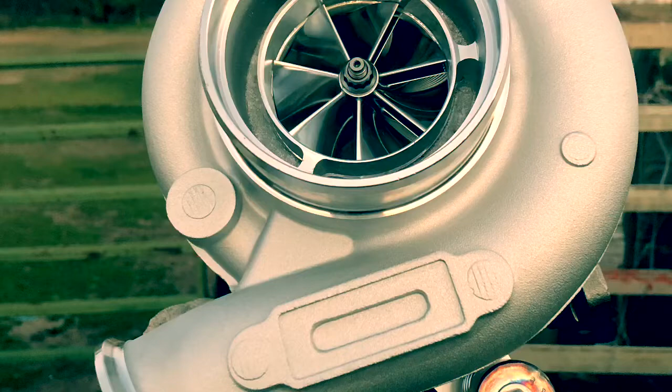I told you guys I'd tell you about the 3 things the turbo cares about, and I'll also tell you what exhaust manifolds do, especially in limited charger classes, or as far as a class rule goes, where there's nothing available and you don't want to change the charger out. But you can do certain things, and by doing this you can get more out of your turbocharger, possibly, as long as you can verify it's a turbine issue and not a compressor deal, or if you're trying to move the peak locations to a higher RPM.

So the horsepower is the same. Say if it makes 800 horsepower at 3600 and you want to make 800 horsepower at 4000, it'll drop the torque number down because we're making the same horsepower at a higher RPM. But we can make that horsepower at the high RPM without running into EGT issues or engine VE issues, volumetric efficiency. So the motor's still going to stay happy and be producing that horsepower just at a higher RPM.

So in case you need more wheel speed, more track speed, you want more wheel speed going down a pull track - these things apply. So, turbine housings.

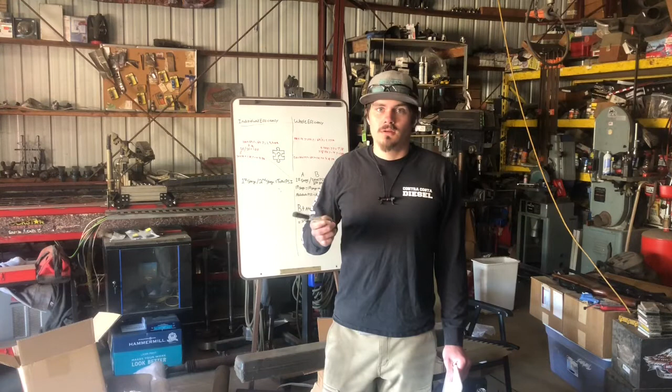Here's the catch-22: the velocity matters up to the point where the turbocharger is rotating at its maximum rotor speed. Say you're operating right at the choke condition - everything up to the choke flow point, usually this is where peak torque is going to be on most turbochargers. We're using all 3: heat energy, pressure energy, so your drive pressure, and then the velocity.

As far as the exhaust speed goes, that's going to be based off of the size of the manifold, the size of the exhaust valve, the exhaust port, the piston speed as far as when the exhaust valve opens, as well as the RPM. That's how all those things are going to be working.

Once you get to the point where you're past peak torque, the only thing at this point now maintaining the speed of the turbocharger is going to be heat and pressure. The velocity, because the velocity through the throat has now hit the point where it's not going to accelerate anymore. Now the turbine wheel is only extracting heat and pressure.

So the pressure is creating a velocity through the nozzle, but it's not a rapidly increasing pressure that we would say is velocity or a force. If the gas has some good speed in it and hammers into the turbine's inducer, that would be velocity. Now if we're doing a constant push against the turbine wheel, I like to see that as pressure.

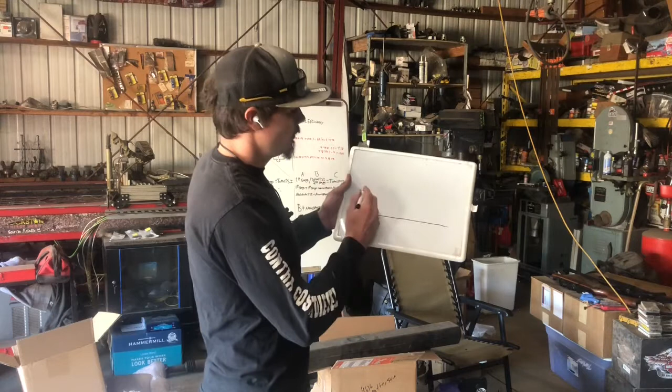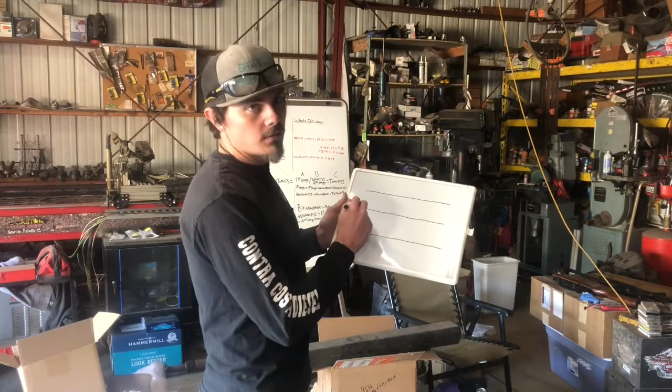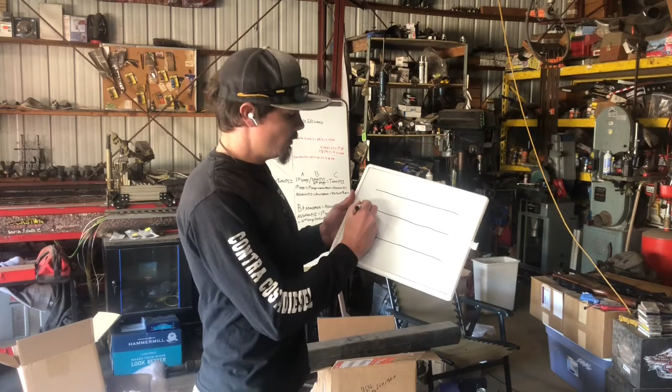So what housings do, hopefully visible here, is we have a baseline, and we're going to compare this to another. We're all used to these sizes, since even Borg Warner, well, not Borg Warner themselves, but we've classified them as a 0.70 and a 0.80, a 12 and a 14, so we can go 12 cm, and up to around 18 cm.

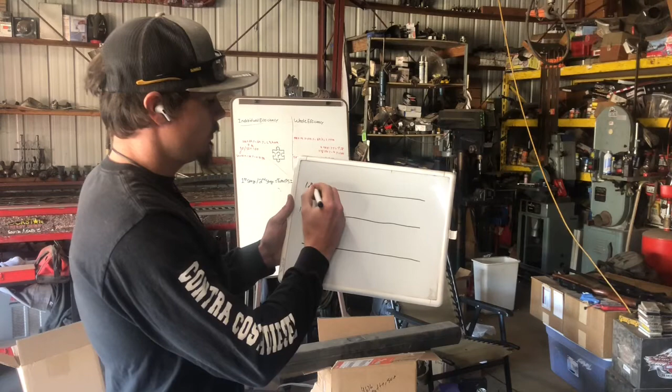So depending on the size of the motor, every time an exhaust valve opens, we have a spike, a pulse wave. It's going to look like this. Every time an exhaust valve opens, you have a spike.

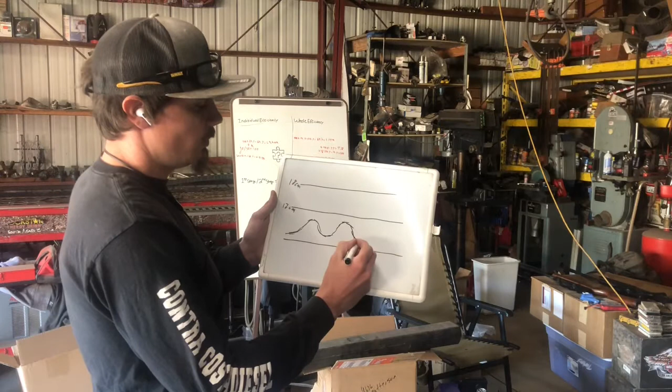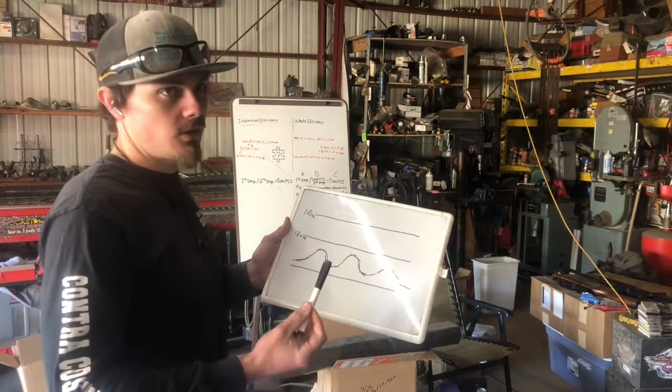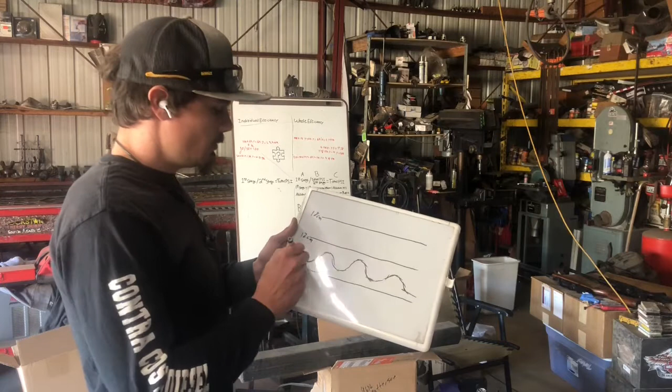Now this pulse only matters up to a certain RPM, and that RPM is frequency based. So that RPM is going to depend on how many cylinders there are, what size each cylinder is, and how often they're going off. But to keep this easy...

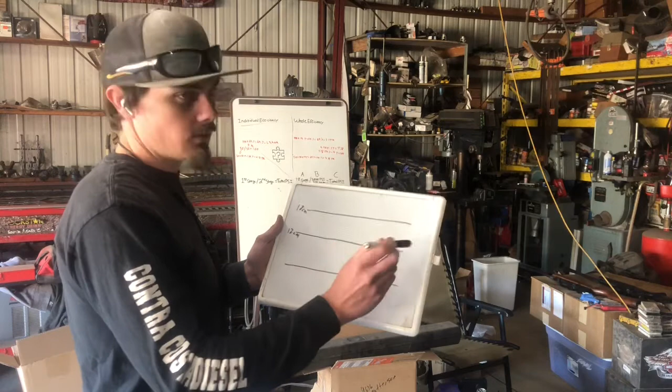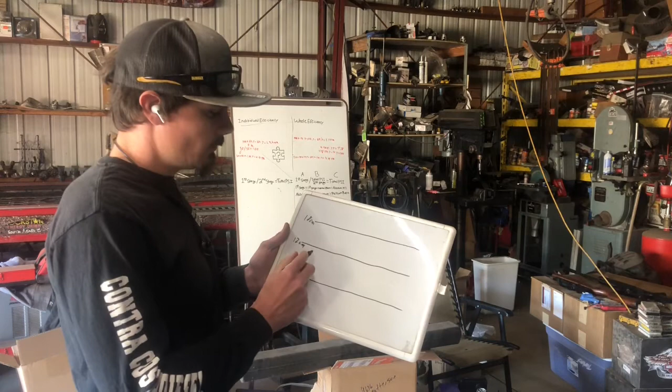On our 6-cylinder 5.9 liter motors, it comes out to about 3,000 RPM. So everything from 0 to 3,000, with 0 being the most prominent pulse, and at 3,000 RPM you would have a pressure number, but the line's going to be fairly flat once we get to 3,000.

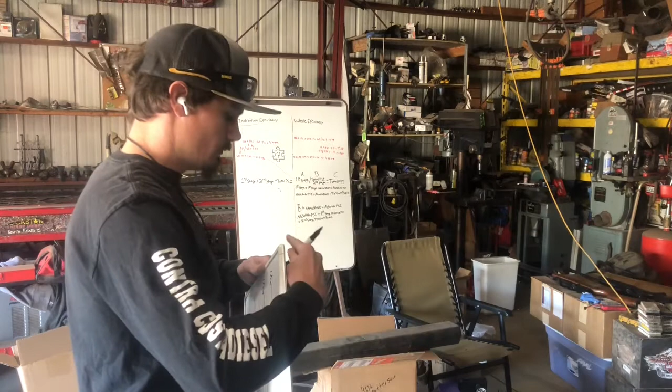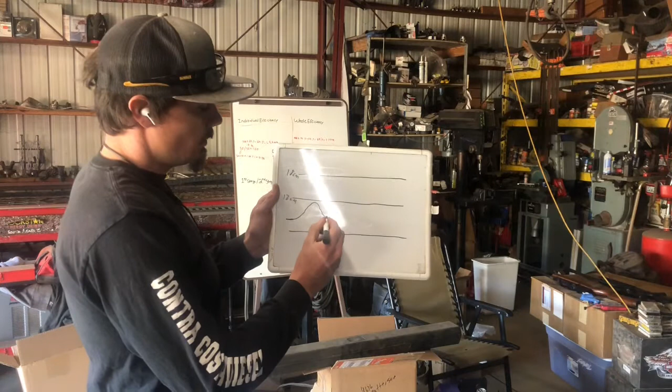So at 1,000 RPM you're going to have this level, then at 1,200 RPM here, and at 3,000 RPM it's just going to sit basically flat in these motors.

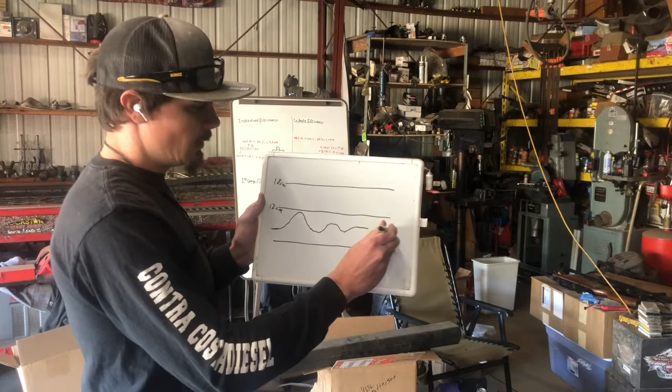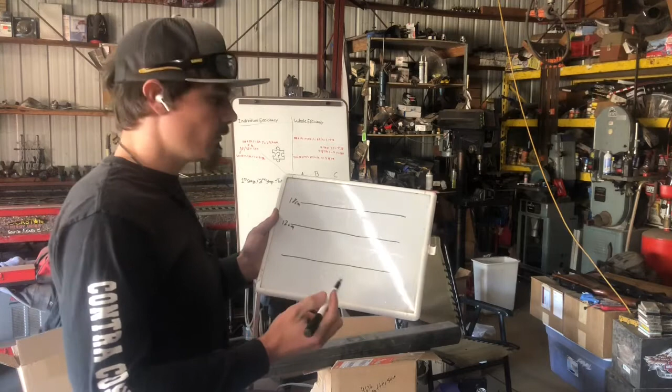That's why on a lot of these high RPM trucks, you don't see undivided manifolds, a lot of them have a divided manifold, because that's how they come. Nobody really makes an undivided performance manifold. But when operating above 3,000, you'll see that they'll have spacers off the exhaust manifold.

So we can see here this spacer coming off the manifold. It may still be divided, but the housing on this massive HX82 in this triple turbo setup, 2 atmospherics, 1 manifold, is not going to be a divided housing, nor does it matter if it's a divided housing. These motors operate at very high engine speeds. They're not looking for response time or spool up characteristics. They will get plenty of speed out of the rotor just by getting the engine's RPM way up high.

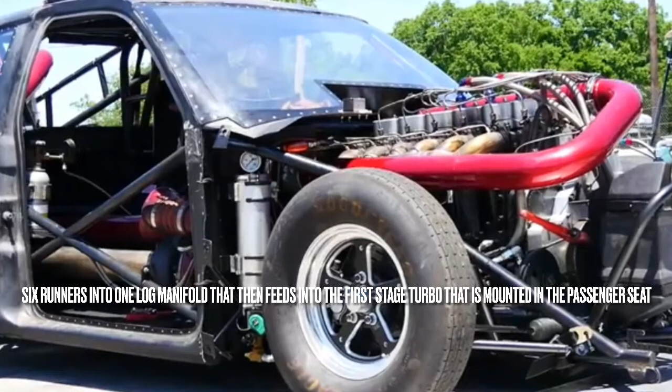This truck here is known as Climate Change. It is a mechanically injected inline injection pump truck that competes in the index racing against guys like Firepunk, in the ODSS racing series.

It has 6 runners into 1 pipe, so a log manifold. That log manifold then feeds a single tube all the way into the passenger compartment where the first stage turbo is located. The exhaust goes through that first stage and then goes all the way back to behind the truck into the bed to feed the other 2 turbos located in the bed.

So like I said, in this case, they don't need any kind of divided pulse tuning going on, and it wouldn't matter anyway if they were trying to play with that. There's a lot of setups out there you can look at that are all set up similar to this in racing and sled pulling.

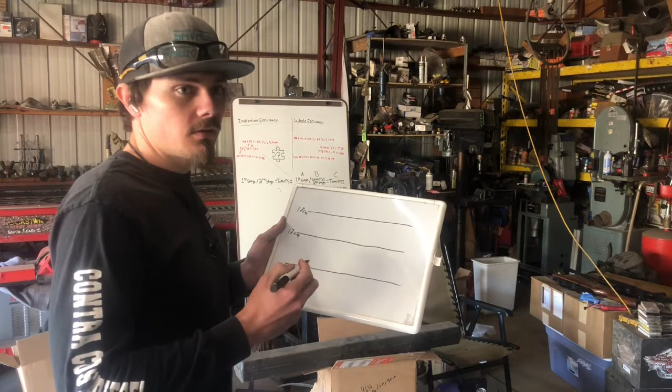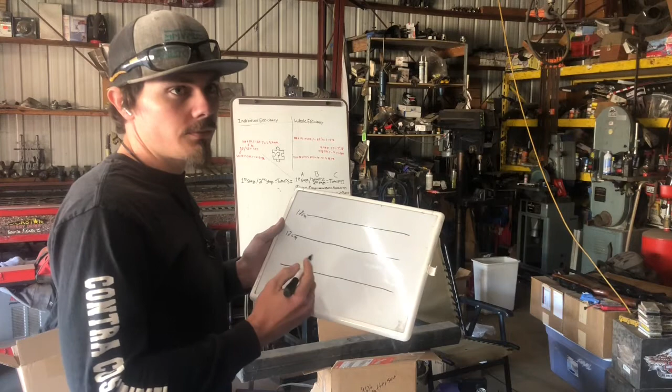And stuff like this is going to cause mixing of the pulses. In these applications where they're going to be running 4,000, 5,000, 6,000 RPMs, it doesn't matter, there's no difference. They're not worried about spool up, they're getting things up to 4,000, 5,000 on the line and then taking off.

If we increase the displacement of the motor, the pulse goes up. So as long as this pulse, when operating in this area, or pressure signal, stays below what the housing is rated for,

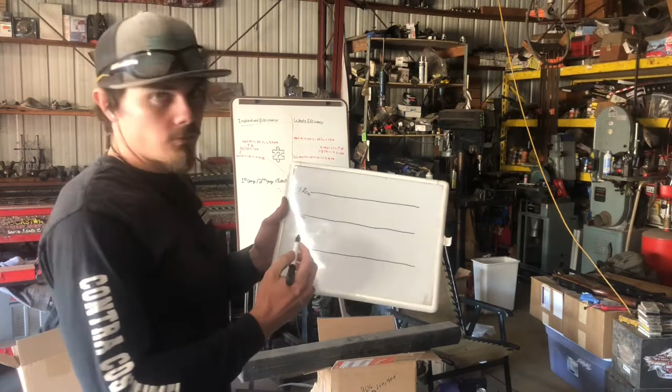peak torque and EGTs and all that stuff will stay good. As the power level goes up, the pulse gets bigger. The engine's dynamic displacement is going up. What will happen, say we went from a 5.9 to a 6.7 motor on the same housing,

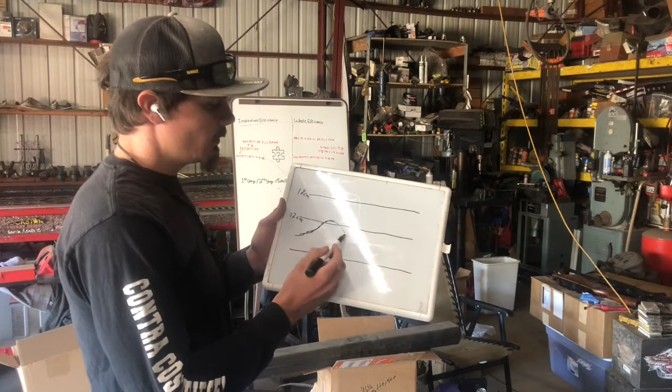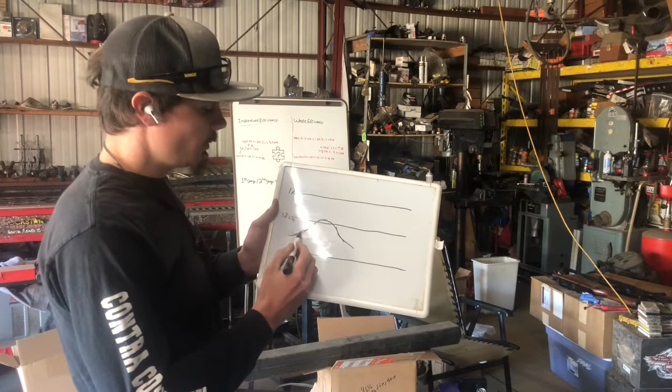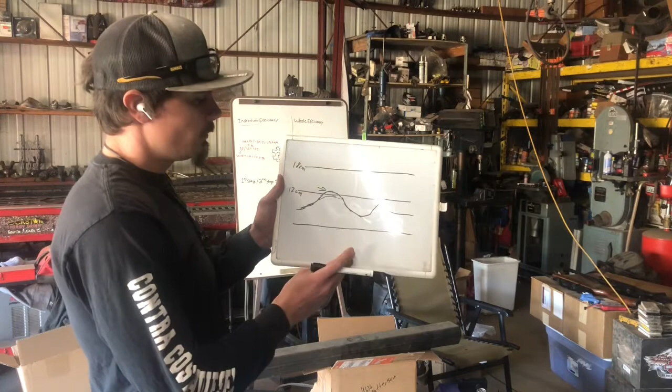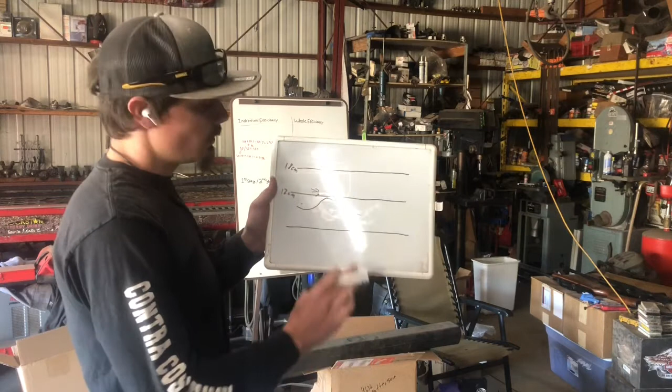the pulse can go past this. So what happens when the pulse goes past the line is we'll see a spike in drive pressure that isn't doing any kind of usable work. So any pulse amplitude or gas pressure below the housing's designed line will be turned into useful work on the turbine wheel. When it exceeds the line, this amount of pressure and signal energy past what the housing is rated for just turns into drive pressure that will be consumed by the housing once the housing has done what it needs to do with everything that was below it.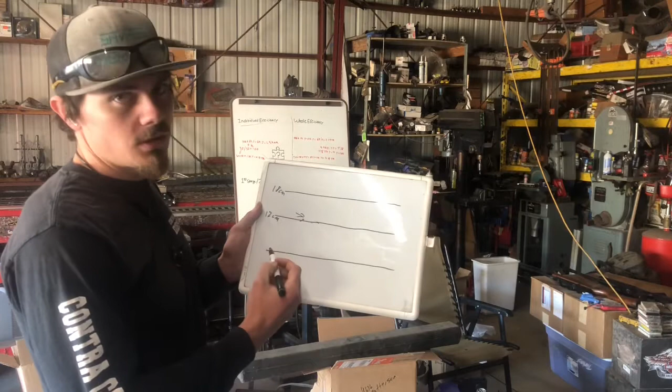If you want to see how this applies, you can look at semi-truck engines that have low flywheel horsepower. We can look at a lot of the older semi-truck motors, 855 cubic inch motors. They'll have a fairly small compressor wheel usually, at 335 crank horsepower, 855 cubic inch diesel motor. They'll have a very large turbine wheel and turbine housing, and the reason for this is that 359 cubic inches at 2,000 RPMs only needs 12 centimeter.

Let's take this up to a 32. When you get to 855 cubic inches at 2,000 RPMs, that cylinder is much larger and the exhaust event is much larger, so that signal event goes right up like so. The larger housing is there for the larger displacement motor.

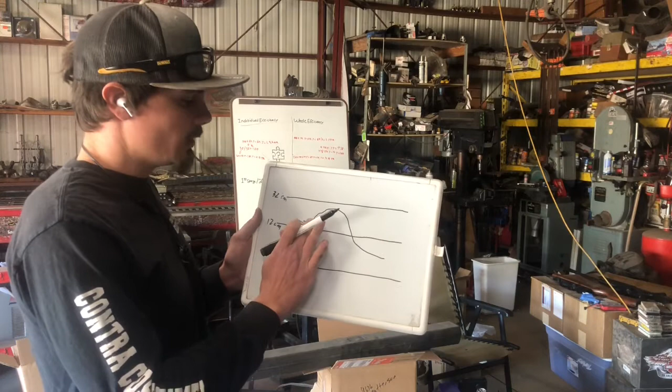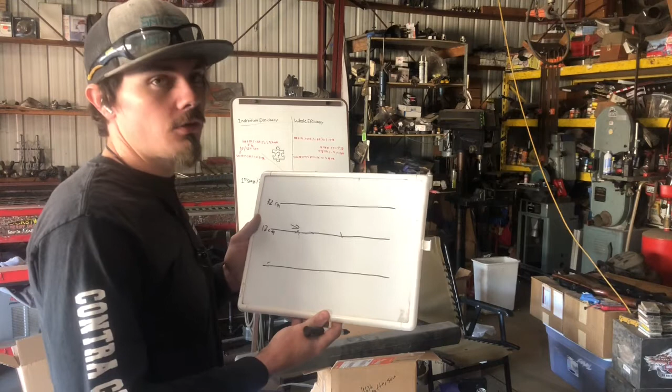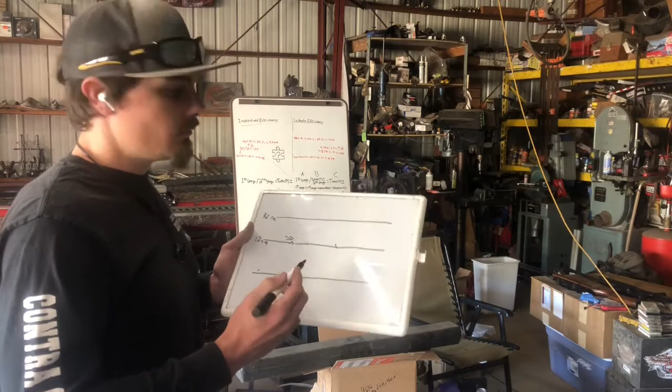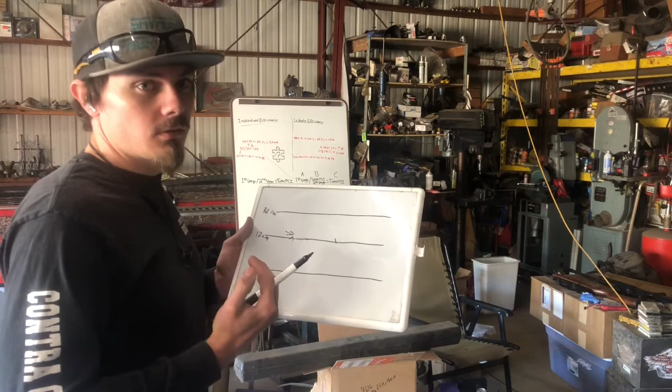The compressor wheel can stay fairly small. A lot of these 335 flywheel horsepower motors have anywhere from a 65 to a 73 millimeter compressor wheel. The main reason that the compressor wheel got larger is because from an OEM perspective, that compressor wheel has to theoretically run 100% duty cycle for 4 or 5 hours. So for longevity reasons and turbo speed reasons, they'll make the compressor bigger to bring it back to a slower rotor speed, so as far as wear and tear on the turbocharger itself, it stays in very good shape.

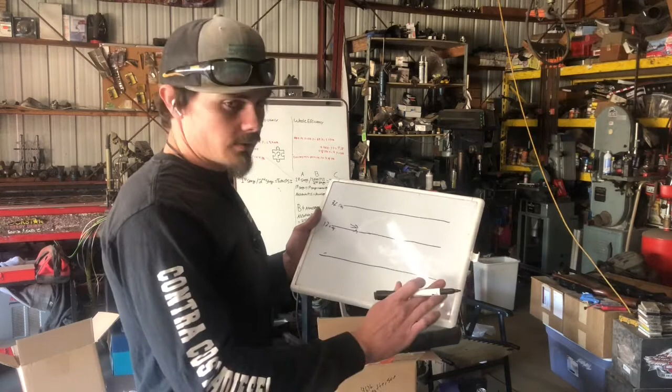But when the exhaust gas—we'll probably go to the table next, it's kind of showing pulses—if you go to a 2-liter motor at high RPMs, it has smaller pulses. A 2-liter motor producing... I know this kind of goes a little bit against it, but it's not set in stone. I guess let's put it this way.

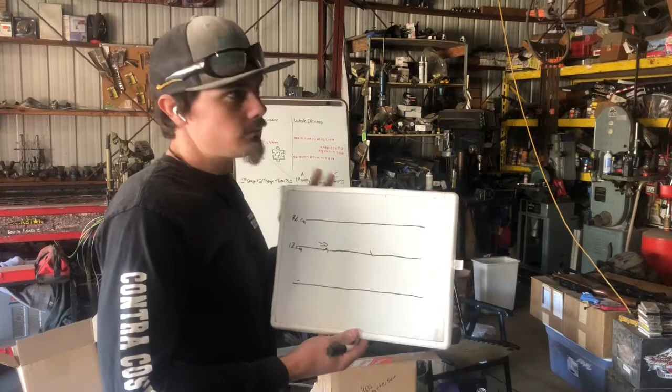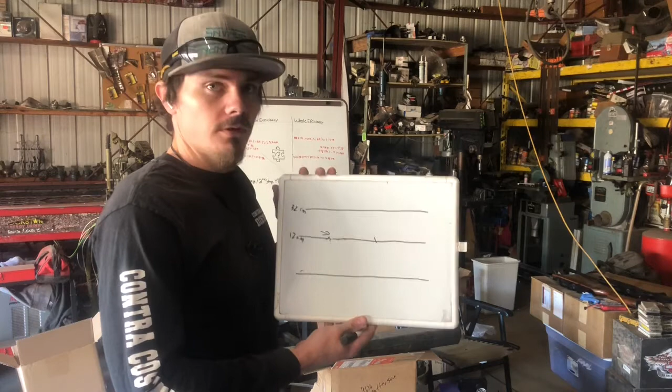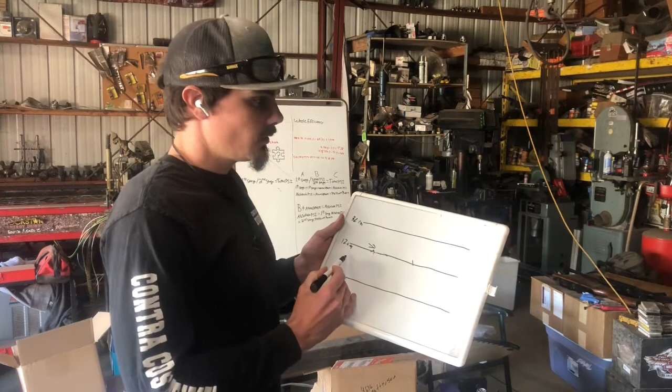A 5.9 liter on one of our turbochargers, our max effort stuff, will do about 930 to 940 wheel horsepower. With that same turbocharger on a 6.7 liter motor, it will do about 840 wheel. So the increased displacement does cause the turbine housing to go inefficient sooner, as it can't keep up with what the displacement's doing per cylinder.

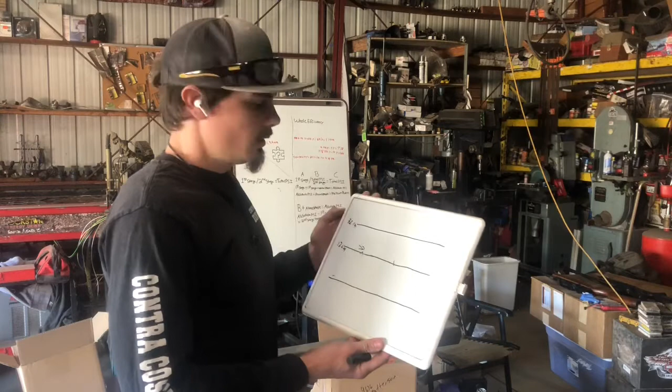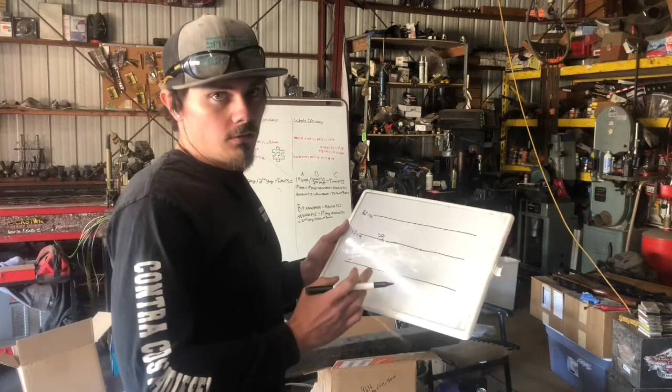The same thing goes for as the motor gets smaller—the same size turbine housing typically can eke out a little more power. So if we went from 5.9 to 3.9, then that housing's now good for a little more horsepower. Not a big change, but certainly it is capable of supporting a little bit more. And that's all given that the compressor can keep up with that.

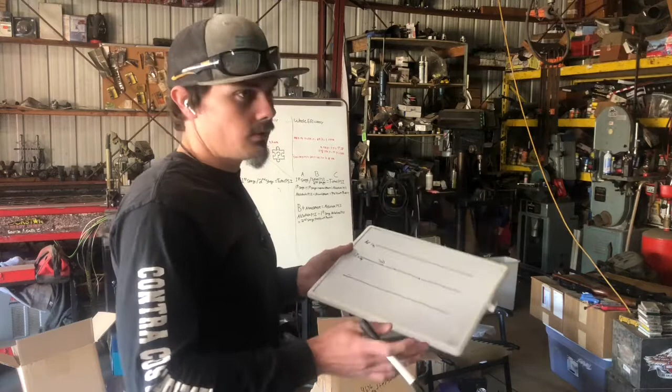It's not like—I think I said it earlier where it sounded pretty set in stone—where the motor's dynamic displacement goes up, which is occurring, and it does matter, but there is some wiggle room in there, as far as a smaller displacement motor can take more advantage of a smaller housing than that same housing on a larger displacement engine.